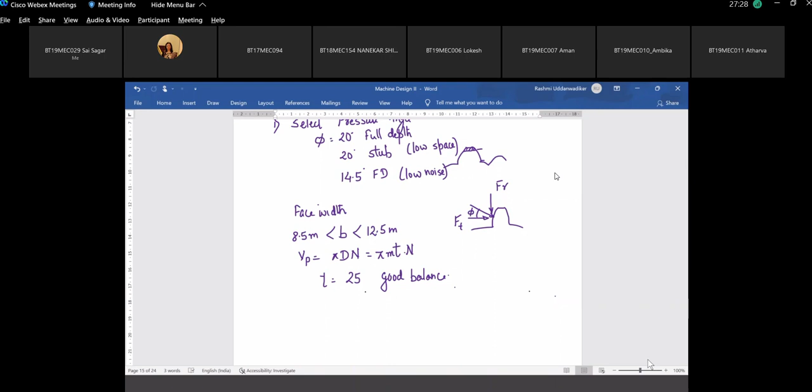Well, all of you have the soft copy of the design data book, right? Sravya? Yes, ma'am. Okay.

I don't know if the page numbers are matching or not. Open the design data book or refer to page number 164 as per my data book, table number 16.1, design formula for spur gears.

Do you have the complete soft copy of the design data book, or are these photographs or images from different pages? Atharva, ma'am? Images, like some person who took the images and combined them. Okay.

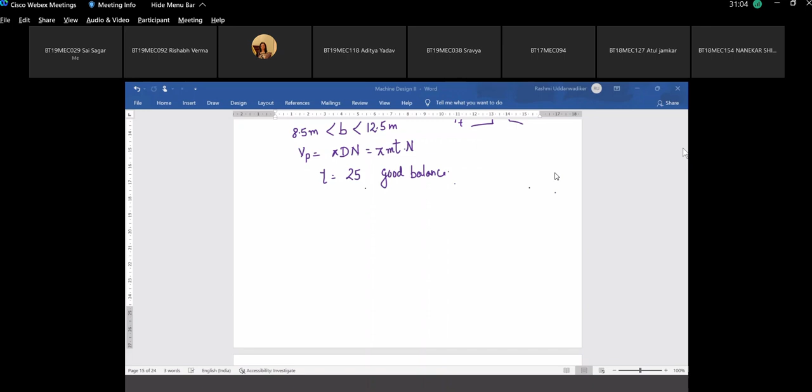Rishabh? I'm sorry ma'am, can you repeat? Jewel, does anyone in this group know the difference between light shock, medium shock, and heavy shock? No, I'm not sure. Not sure, okay.

Let me tell you something. It's something like a jerk to the gear when it is moving. Yes. And when do you get a jerk?

In what kind of machines would you get a jerk? Have you studied theory of machines, balancing? Yes. Okay, which machines have more jerk, rotary or reciprocating machines? Reciprocating, because it cannot be completely balanced, whereas a rotary machine can be balanced.

Completely balanced, yeah. So a steady load is usually when there are no rotating parts, or a minimum number of rotating or reciprocating parts. That is a steady load. So normally, for steady load running 8 to 10 hours per day, this is the most ideal situation, where the load factor is 1, as given.

If you have an input, usually say a motor, and then you have an output. Say a motor is driving a diesel engine or a generator, or driving a pump, or it is an automobile or an internal combustion engine as input, and the output is some other application, say a compressor. So you have an input and an output, and in between you couple the shafts, with a gearbox mounted to reduce the RPM or increase the torque.

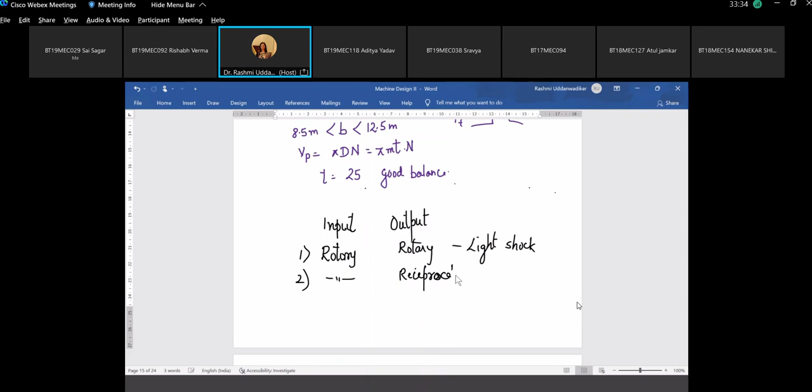If one of them is rotary and the other is reciprocating, there are shocks here, so this is medium shock. And if both are reciprocating, a reciprocating IC engine operating a reciprocating pump or compressor, then this is heavy shock.

Now, when you are designing a problem, it will never directly mention whether it is light shock, medium shock, or heavy shock, but it would probably specify that it is an electric motor driving a drum, or driving a pump, or something similar. So based on the input and output, we determine the kind of shock, and accordingly select the load factor.

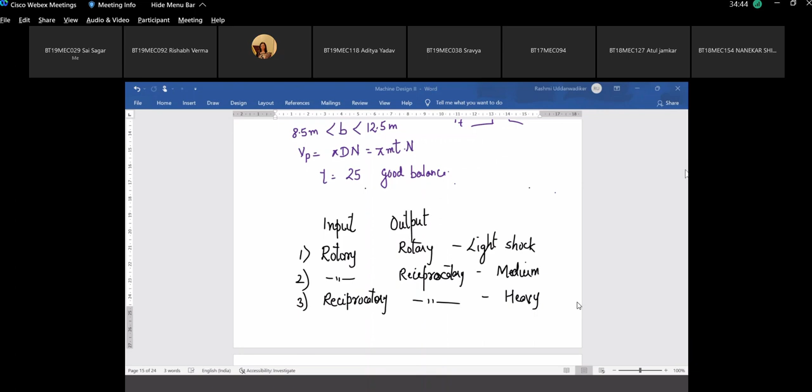So what is the value of load factor for medium shock continuous duty, continuous service 24 hours per day? From the table, it is 1.8. This is the service factor, which means if your rated power is say 100 kilowatt, then we multiply it with 1.8, and we are designing it for 180 kilowatts because it has medium shock.

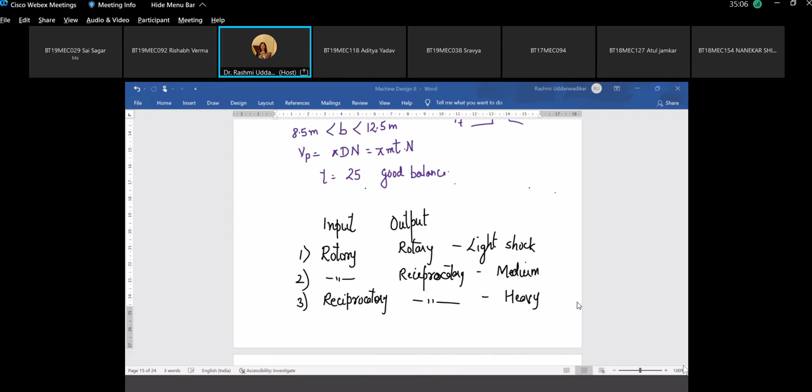That is the amount of jerk, and so our design load is increased. So we are designing a gear for 180 kilowatts. That is the meaning.

Come back to table 16.1. The tooth load or the static load Ft is given as design power upon Vp, which is the pitch line velocity. You know this formula, where Vp is pi dn by 60. Then the Lewis equation is given, where Fb is the beam strength or the bending strength of the beam in bending, which is equal to S naught, where S naught is the strength of the material.

Cv is the velocity factor, which we discussed in the other class. B is the face width, Y is the Lewis form factor, and M is the module. Then the dynamic load Fd, this also we discussed. Fd is sum of Ft plus Fi, and the formula for Fi is given. This is the Buckingham's equation. C is the deformation factor, and the value of C deformation factor is given in table 16.4.

You see that table? Depending upon what are the materials, whether it is steel and steel for both gear and pinion, or grey cast iron and steel, and the pressure angle or gear profile you are selecting, 14.5, 20, or 20 degree stub tooth, you get the value of C. Suppose you select grey cast iron for both gear and pinion, and if you select 20 degree full depth, what is the value of C given in the table?

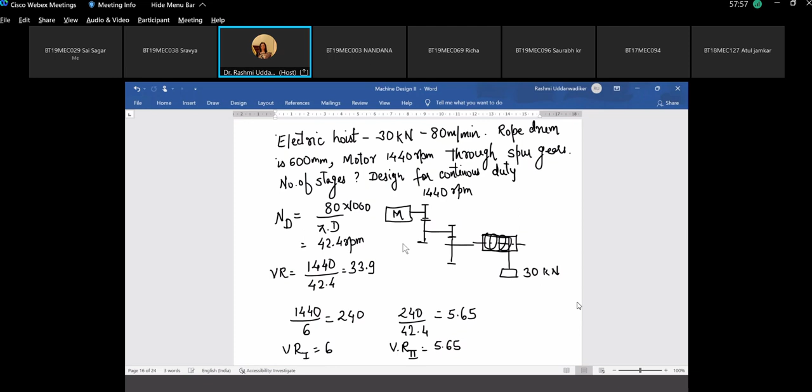So this particular pinion is rotating at 1440 RPM. This gear is rotating at 240 RPM. Because these two are mounted on the same shaft, this is also rotating at 240 RPM. And then here the reduction is 5.65 times, so this rotates at 42.4 RPM. This gear is mounted, or this is on the same shaft in which this drum is mounted. So the drum also rotates at 42.4 RPM, giving a linear speed of 80 meters per minute.

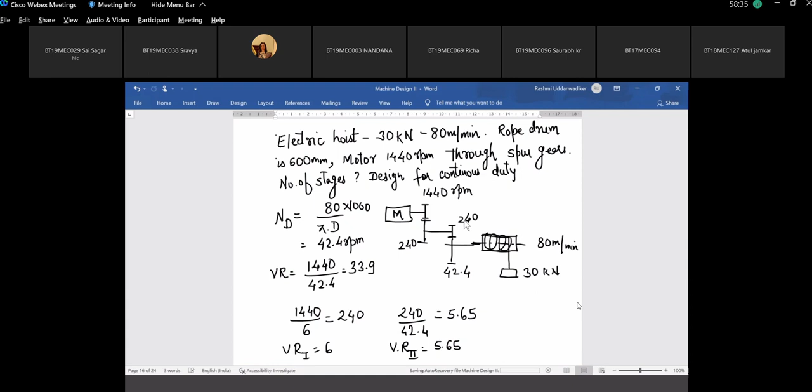So we have to design this gear pair and we have to design this gear pair. Till here, is that clear what we have done? Is this part clear? Atharva? Rishabh?

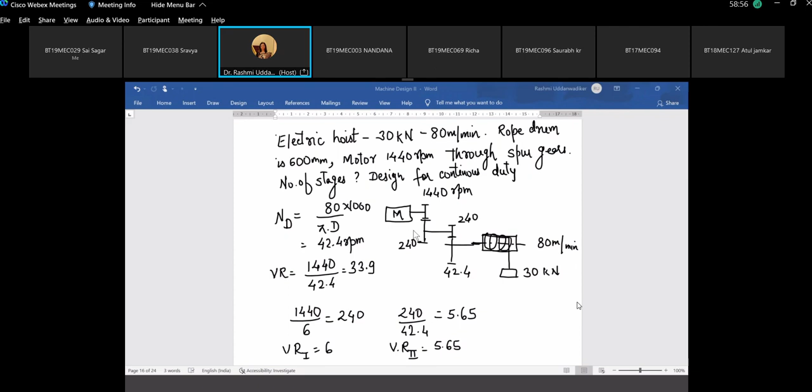Okay, let us start with the first gear pair. What start? I am going to tell you about the first gear pair. Second gear pair, I want you to design. Yes, please.

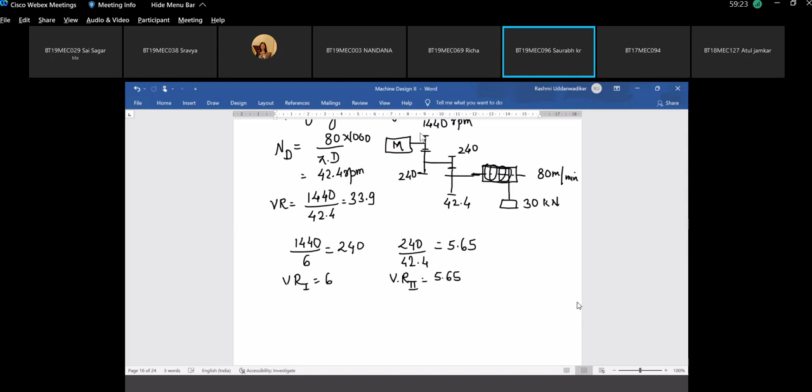Ma'am, 6 is coming from the limitation of velocity gear ratio. Sorry, I didn't get you, what is your question? Why are we dividing by 6? 1440 by 6. Okay, here the velocity ratio that maximum you can have for a spur gear is 6, which means you can reduce only from 1440 to 240, because this is the maximum limit of velocity ratio that a spur gear can have. Isn't it? Which means for the first stage reduction is 6 and total reduction of velocity ratio is 33.9. And so for the second stage, the reduction is 5.65, so that you reduce from 240 to 42.4. Is that okay? Yes, ma'am.

Okay, good. So now we are going to start with the design. Say this is pinion 1, gear 1, pinion 2, gear 2. Let us start with designing the first gear pair P1 G1. The first thing that we know is the design power. We have to get the design power PD.

Now this entire design will take 1 hour time minimum, which in exam you are expected to complete in half an hour or 20 minutes. So if you practice more, you can probably do it. Rated power into the service factor K. What is the rated power?

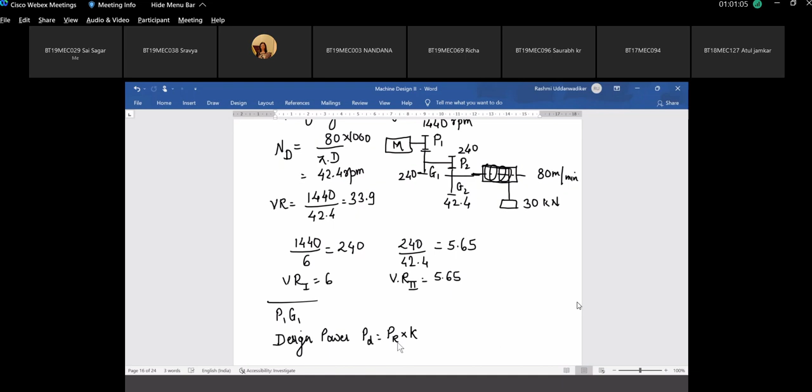It has to lift a weight of 30 kilonewton with a linear velocity of 80 meters per minute, which means the rated power is 30 kilonewtons into 80 meters per minute. Convert it to seconds and you will get it in kilowatt. Give me this value. This is kilonewton into meter per second. This is the load it has to lift at this linear velocity. Do we get 40 kilowatt? This is the rated power.

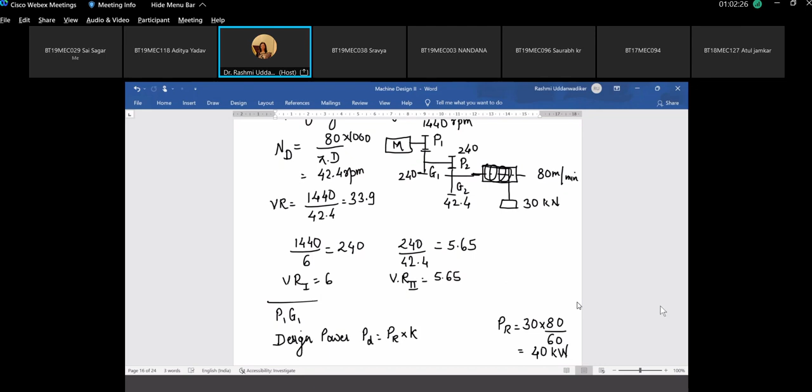Now this is the power available or the power required at the drum. Do you think the same power will be generated at the motor with so many moving parts? We will require more power, yes, to account for the losses. So the rated power should be more if you want 40 kilowatt of power here. Normally, the efficiency of a gear drive is how much? What do you think? How much would it be?

Any idea? About 95, yes, it is almost 98%, 97%. That is the efficiency of the gear drive. So the losses are minimum if the gears are perfectly designed.

So let's take it 98% efficiency. We are assuming efficiency of the gear or the gear pair as 98%. And so the rated power at the motor would be the rated power 40 kilowatt at the drum shaft upon 98%, that is 2% loss in P2G2 second gear pair, into 2% loss in the first gear pair.

You can go with 95% also, or if you don't want to take this, you can just write down assuming efficiency of the gear pair is 100%, and continue with 40 kilowatt. In a design problem, the answer doesn't matter. What really matters is whether you know that there would be a loss. So if you're assuming 100%, that means the losses are minimum. So what is the rated power of the motor?

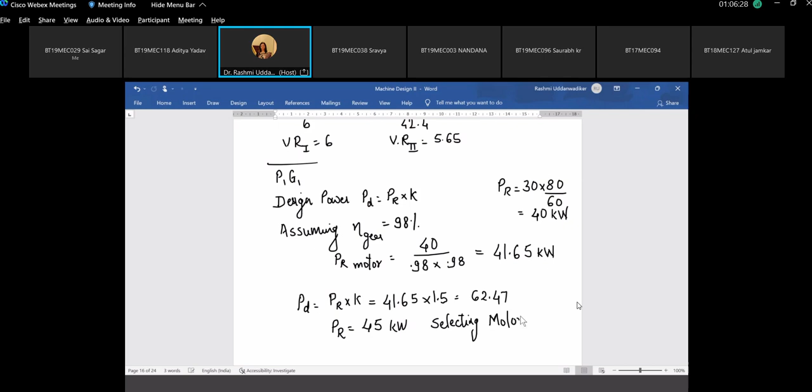So if I am selecting this motor, what are the standard ratings available for the motor is also given in the design data book. Selecting the motor of next available value, that is 45 kilowatt. So if I take this as PR, what is my PD? This rated power multiplied by the service factor. So this is how much? 67.5.

Now we are going to design for this power. This is the power available at pinion 1, and we are starting with the design of pinion. This is the design power of the motor, and the motor is carrying the shaft which has the pinion 1. So we are starting with design of pinion 1, which is mounted on the motor shaft, where the power available is, or you have to design it for 67.5 kilowatt.

So we'll always start from assuming the number of teeth on the pinion. How many number of teeth you will assume? We discussed just now, 25. For good balance, we always go for 25. You can mention here for good balance. This will always keep you safe.

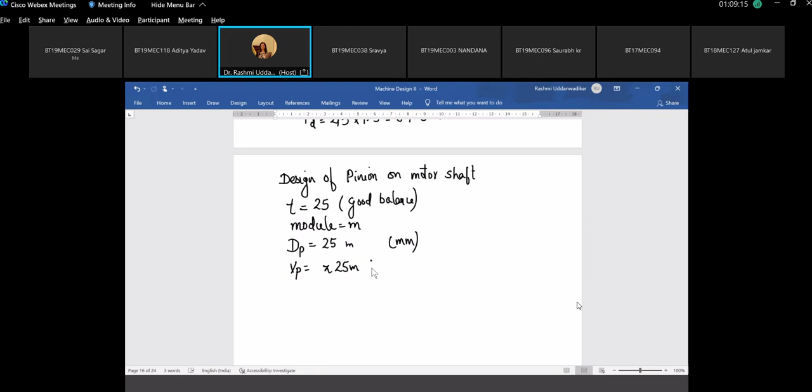Give me the value of Vp. Pi d n upon 60. Give me the value in meter per second. .88 meter per second. 1.88 times m. This is now in meter per second.

This is Vp. So what is the static force responsible for power transmission? This is the design power upon this peripheral velocity. You will get something upon m. Give me the value in newtons. Yeah, it is 35.9 upon m kilonewton. 35.9, 35.8, 35.9 upon m kilonewton, or this is 10 raised to 3 newton. This is the force which is responsible for transmission of power.

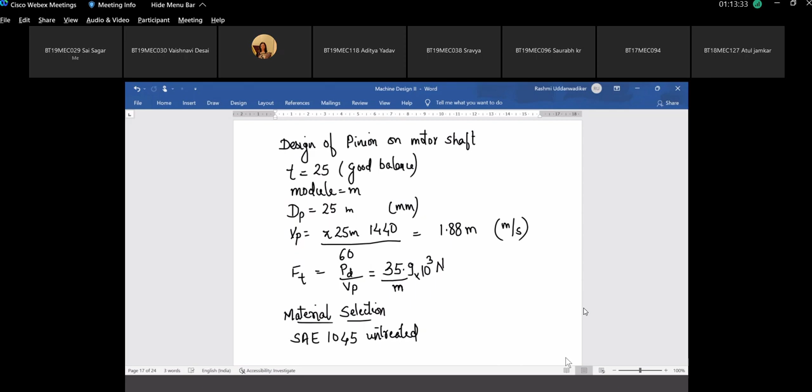Now normally the gear rotates at a lower RPM than the pinion, or the pinion rotates at a higher RPM, as we have seen. Pinion rotates at 1440 RPM and gear at 240 RPM. Pinion is smaller in size, rotating at a higher RPM.

So out of gear and pinion, the material for the pinion should usually be stronger, meaning its strength should be more. You can go with the same strength, but to economize, we can select a gear with lesser strength. So if you select SAE 1045 for pinion, you can select SAE 1020 for gear, or SAE 1035 for gear, which is slightly smaller. Okay, so which one do you want to select?

You can as well go for cast steel also for the gear. Let us go with cast steel.

Ma'am, why should the pinion be stronger than the gear? Because the gear has more length on its teeth. Yeah, but the RPM is less, it is rotating at a lower RPM.

For the same power transmission, because RPM is less, it has to undergo lesser load, and the pinion, being smaller in diameter and rotating at a high RPM, has a higher chance of failure. We also have a test for which one is weaker and stronger, and I'm coming to that once we select the material for the gear. So I'm coming back to this point.

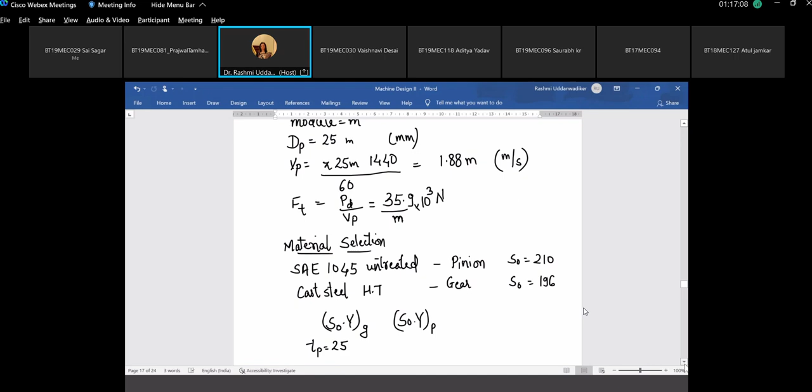Number of teeth on pinion is 25. With a velocity ratio of 6, what will be the number of teeth on gear? 150. And give me the value of Y.

Now this Y depends upon the number of teeth. Have we selected the profile? Table number 16.5 gives us the value for the modified Lewis form factor. So normally what gear profile will we be selecting, Sravya?

Ma'am, 20 degrees full depth. Full depth, okay. So the formula for Y is given as how much? 0.485 minus 2.87 by T. Right, so give me the value of Y for pinion and gear.

In this design data book, SAE untreated and heat treated values here are talking only about the basic strength. It is not talking about hardness, ductility, or the stress relieving part. That is required for checking or for taking into account other factors. We are here talking only about the strength, so the advantage of going for untreated versus heat treated material is not obvious from here.

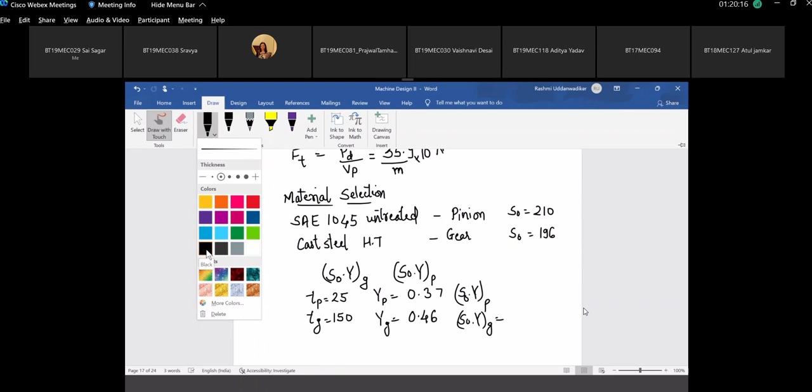78 and 91. So for pinion, even after selecting SAE 1045 untreated, we are getting S0 into Y as only 78, whereas for gear it is coming out to be 91. So even after selecting this material, it is coming out to be weaker.

Pinion is weaker. Now if you select both materials as same, if you select both as SAE 1045, this would be further stronger. This value would go up if you change this material to same as that material. So this is already strong. If we are designing it for the pinion, and if pinion can take a load of 30 kilonewtons easily, or the design power of 62.47 kilowatt, gear can definitely take it because it is stronger. That is the reason we are taking the pinion, which is the smaller of the two with a smaller diameter and less number of teeth, to be made out of a material with larger strength as compared to gear.

Is that clear now? Somebody asked me again why we are going for pinion with a weaker or stronger material than gear. Yes ma'am, okay good. So pinion is weaker, so our design is based on pinion.

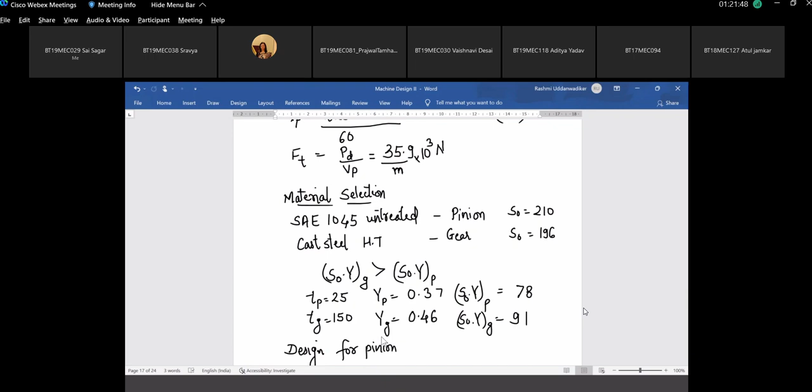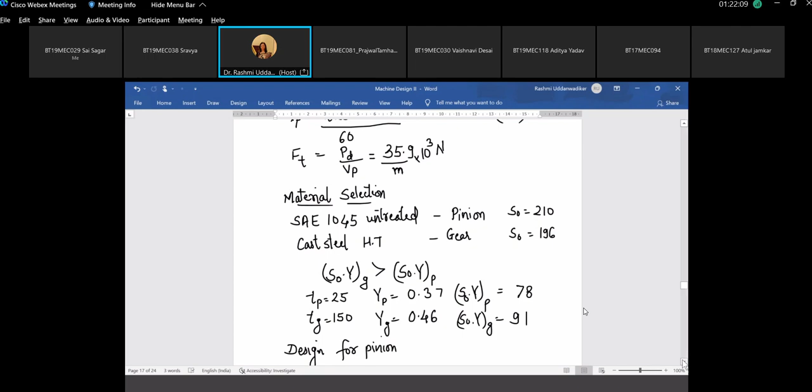You might end up with materials such that gear is weaker. This can also happen. If you are selecting say cast iron for gear and SAE 1045 for pinion, and the number of teeth or Y comes out such that S0 into Y for gear is 75 and for pinion is 78, in that case we'll design it for gear. So this check is a must - which one is weaker - design for the weaker, or the worst case, so that we are still safe.

How long can we continue? Okay, the next is value of FT. Do you have any doubts till then, or should we stop here and continue in the next class, because this is going to take the entire next class also. If you have doubt, we can discuss that right now, because this is an important topic. And I'm saying this is important because on similar lines we'll be designing the helical gear, the worm and the worm wheel. For the next entire month, probably we'll be discussing only about gear design. So what we are doing here, we are going to repeat the same thing with little modification over there.

Do you want me to go for the next part, or should I explain this part again quickly? Yash, Atharva, Amir, what do you say? Nobody is answering. What do you want me to do?

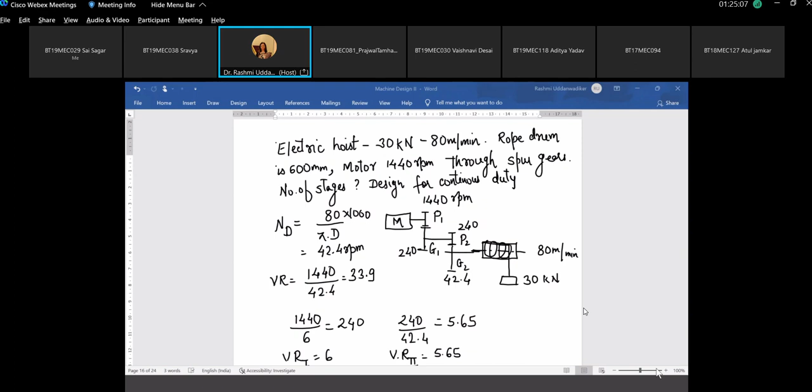Now we start with the design. So we are designing for the first gear pair, P1G1. We have to find out what is the power available at this shaft. So the power at the drum shaft is known.

It is lifting a load of 30 kilonewton with a linear speed of 80 meter per minute. So the power required here is 40 kilowatt. At the motor, the power required should be little more than that, assuming there are losses of 2% at each gear pair. This is on an average, the efficiency of a spur gear, which is 97 to 98%.

You can even assume 100% efficiency and go with the motor rated power as 40. On the safer side, we have assumed the efficiency as 98%. This is for the first gear pair, and this is for the second gear pair.

Why have we taken 0.98 two times? This is for the first gear pair P1G1 and this is for the second gear pair. Here your 41.65 kilowatt is the power. There is a loss of 2% here and again a loss of 2% here, so the power available here is only 40.

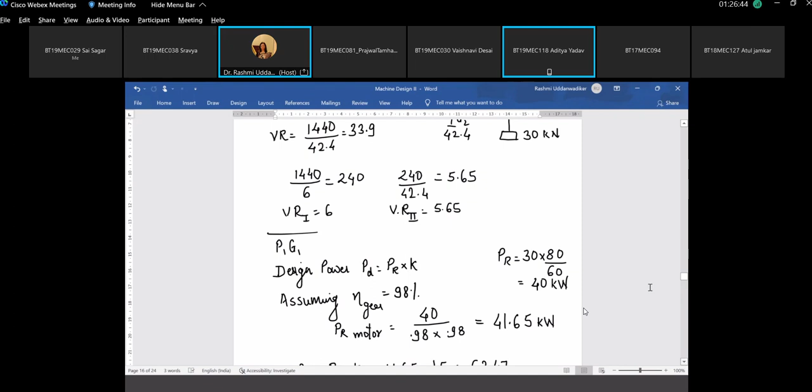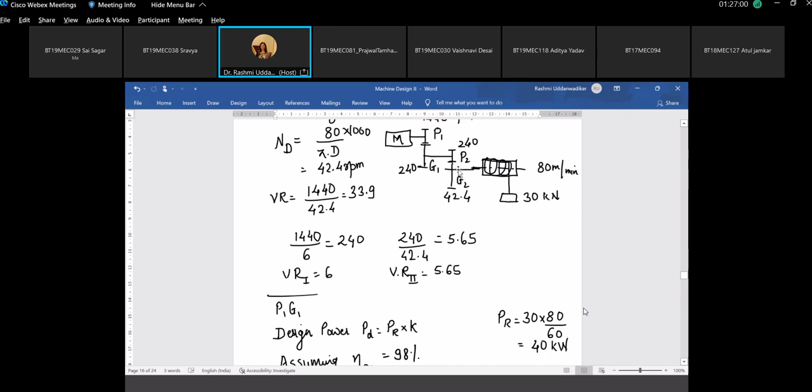We have to divide it as per the number of stages we have calculated. If you want to find out what is the rated power available for this shaft, you divide it only once, so here it will be 40.82 something. And again from here to here it is 41. That means there is a loss of 2% here and a loss of 2% here. So at every stage we consider 2% loss, and so we are dividing it twice, giving the rated power of the motor as 41.65.

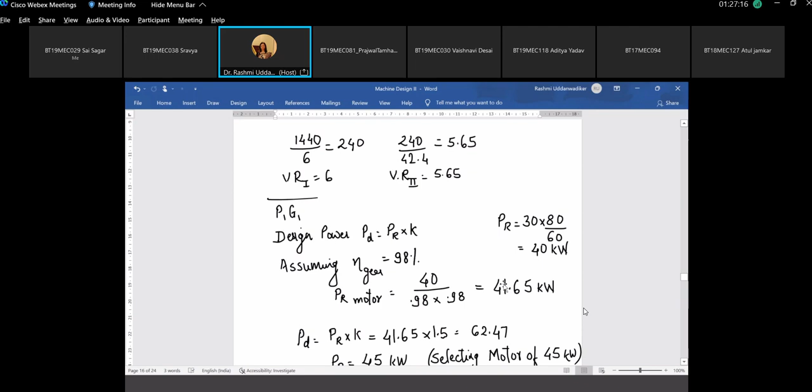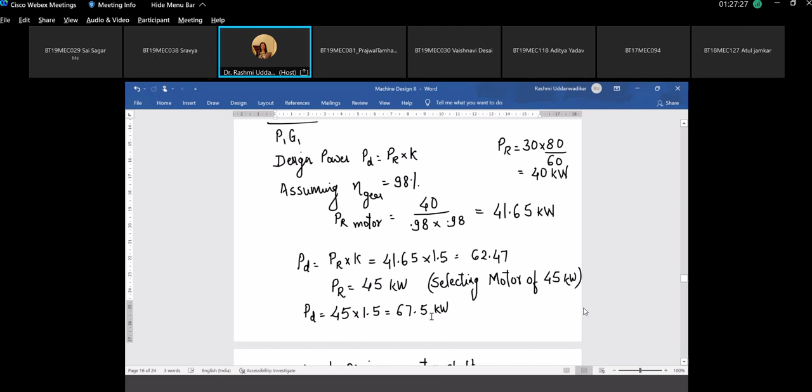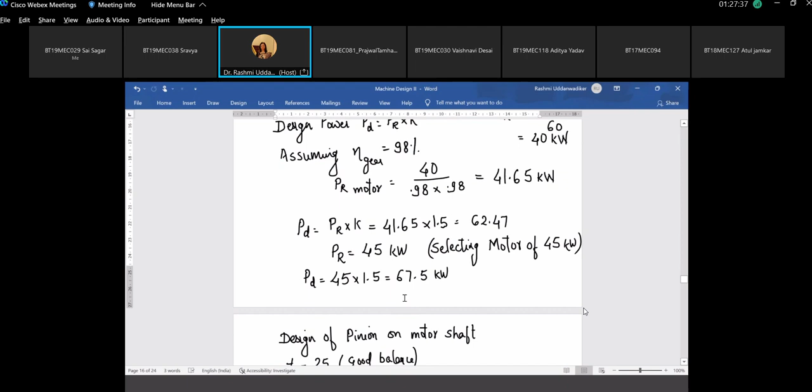Now you will never get a motor of this exact rating. Motors are available at 40 kilowatt, or 45, or 50, or 60, and so on. So let us select a motor of 45 kilowatt rated power, but we are again designing based on the service factor. The service condition is continuous duty and light shock because both input and output shafts have rotary motion, so the service factor comes out to be 1.5, with a design power of 67.5 kilowatt. So we'll start designing the pinion which is mounted on the motor shaft, where the design power is 67.5.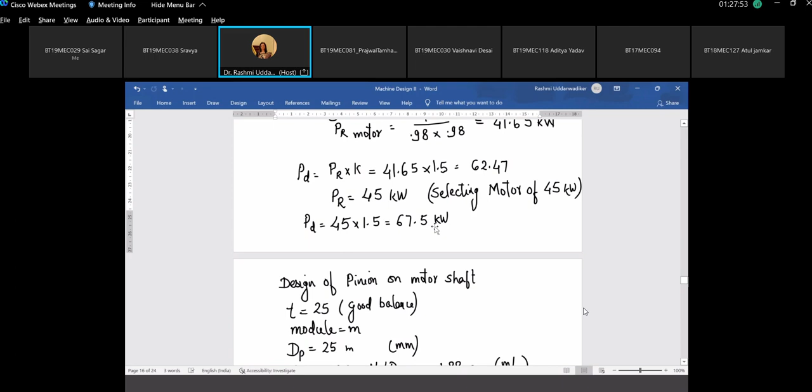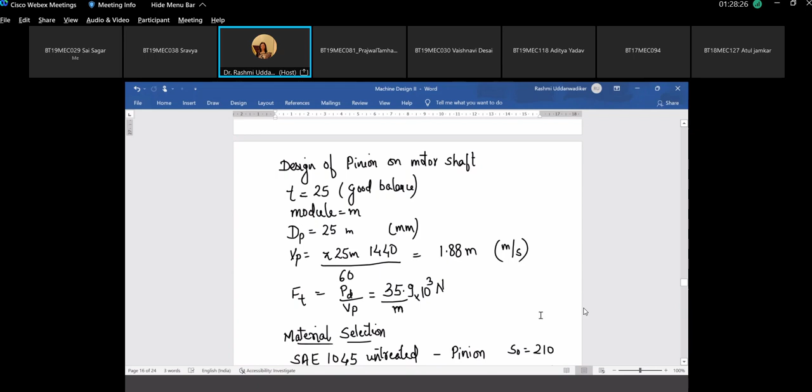We are selecting the number of teeth as 25 for good balance. We assume the module to be m. So the diameter of the pinion comes out to be 25m. Peripheral velocity comes out to be 1.88 times m, in meter per second. This is the power responsible for transmission of power or torque. This is the force, and this force is PD, the design power upon Vp, which again comes out to be something like this, by m.

Next stage is material selection. We select the material from the design data book such that the pinion is stronger than the gear, from the S0 value. But for actual design, we always compare pinion and gear by multiplying this S0 with Lewis form factor Y. Lewis form factor is a term which depends upon the number of teeth.

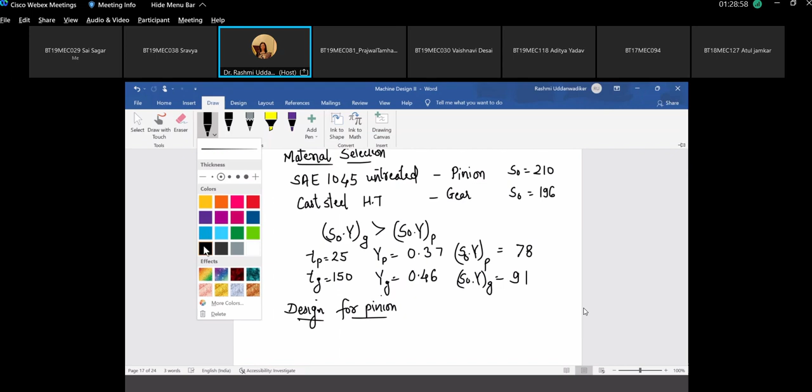So from the formula, for 20-degree full depth pressure angle, we have assumed 20-degree full depth pressure angle. The formula for Y is given, from where you calculate YP and YG, and we have to ideally compare which one is weaker and stronger by the product of S0 into Y. Whichever comes out to be lesser of the two, we design for that. This is precisely the reason that even with S0 196 for the gear, since the number of teeth is more, its diameter is more, so we end up with this always stronger than the pinion.

So you can actually go for a gear with lesser S0 as well. You can go for cast steel untreated with 140. Try even if this is 140 multiplied with 0.46 -- is this still stronger than this, or is this weaker? Quickly, someone can tell me. If you go for cast steel untreated, S0 140, what is 140 into 0.46 coming out to be? 64.4. Now with cast steel untreated, your gear will become weaker.

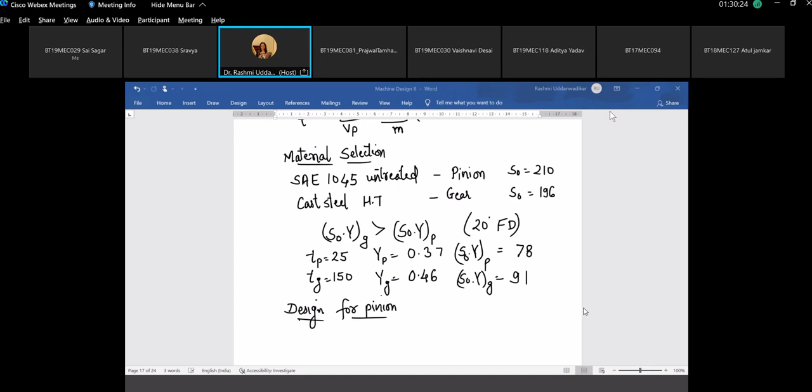Then we'll have to design for the gear. So we'll stop here for the day. Next class we'll continue with the same problem.